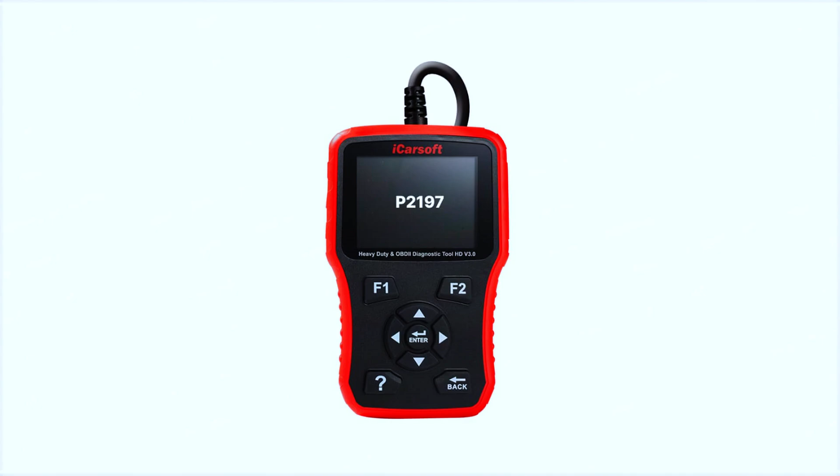Today, we're tackling the P2197 trouble code: oxygen sensor signal stuck lean on bank 2, sensor 1. If you're seeing this code, your engine may be running too lean, causing performance issues and poor fuel economy. Stick around, and I'll show you how to diagnose and fix it.

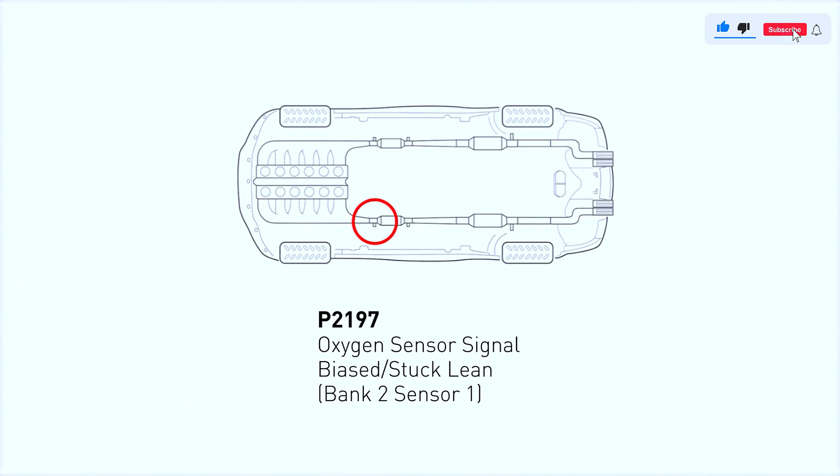P2197 is an OBD2 diagnostic trouble code that indicates an issue with the oxygen sensor. It means that the powertrain control module (PCM) has detected that the air-to-fuel ratio is too lean. Check engine light. Misfiring engine. Reduced power. Rough running motor. Overheating engine. Reduced fuel economy.

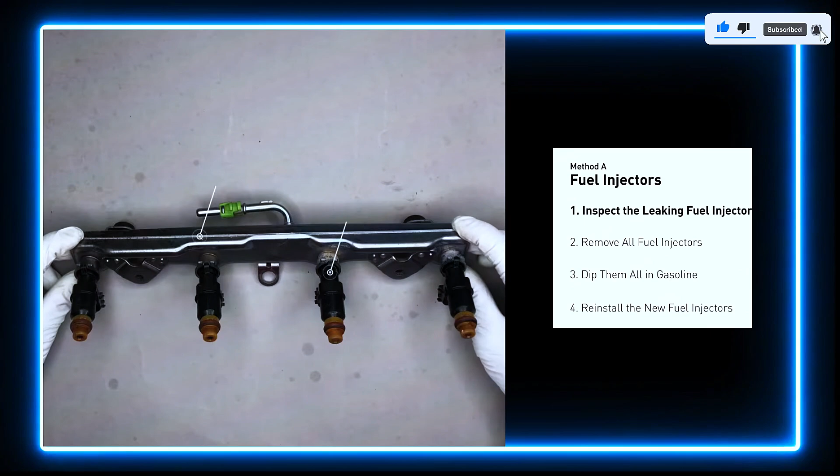The fuel injectors are mounted in the intake manifold, so that they spray fuel directly at the intake valves. Inspect the leaking fuel injectors on the fuel rail. Carefully remove the fuel injector. Make sure the new injector has new seals, and never use the old seals. When you change the fuel injectors, change them all as a set, otherwise the engine will run unevenly.

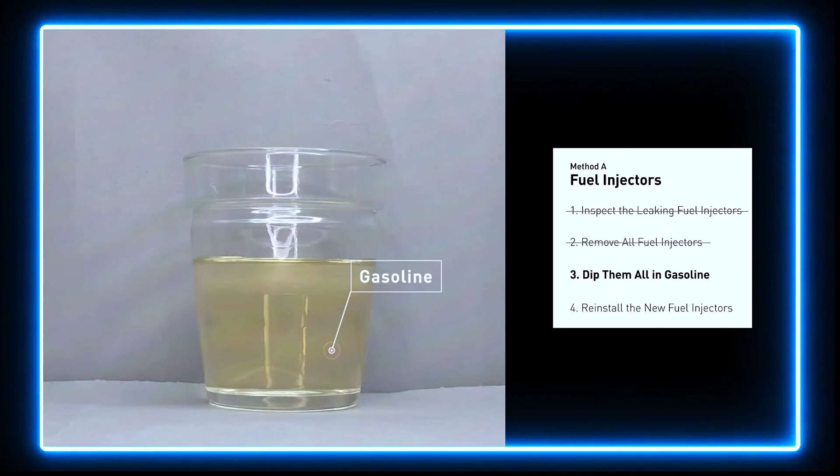In order to prevent leaking, get some gasoline, put it in a cup, and then dip the new fuel injector into it. So the seals get wet with gasoline, and it will go in and won't leak after all. Just slide all the new fuel injectors in.

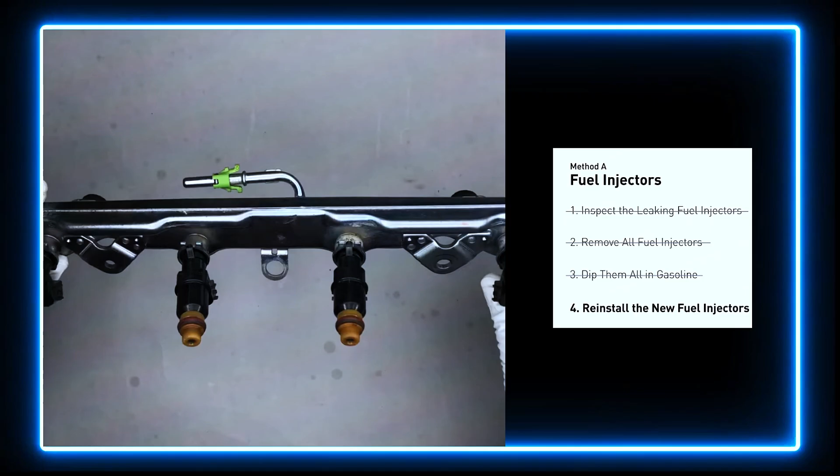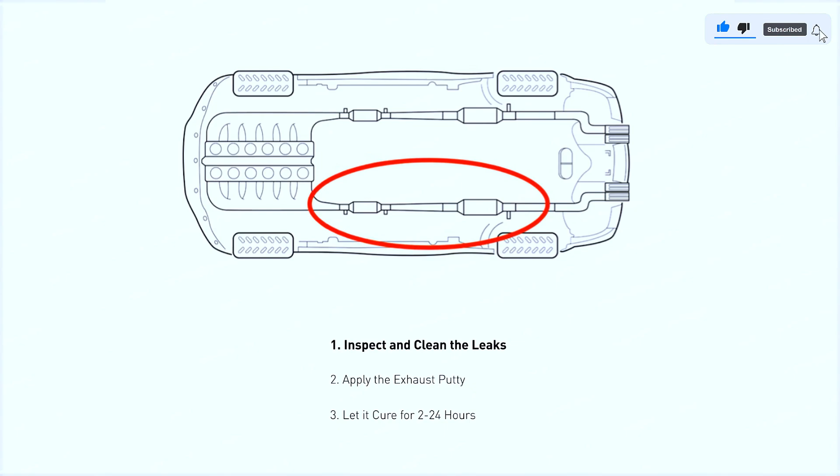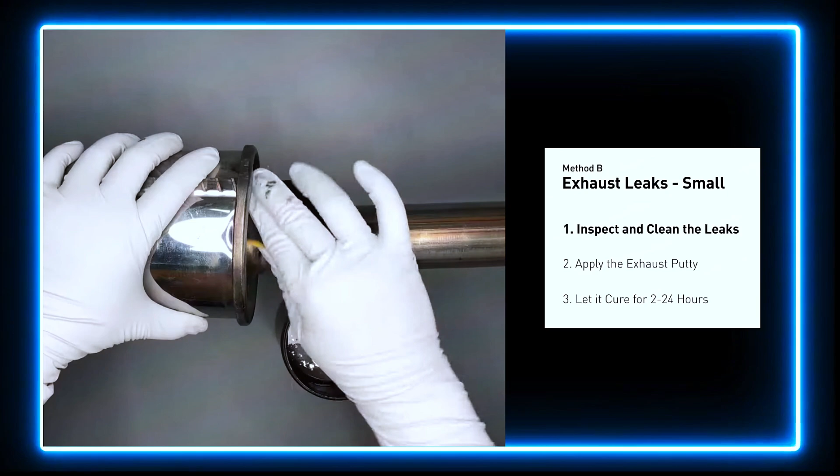The exhaust system begins at the engine combustion chambers and runs along the undercarriage of the vehicle, eventually ending with a visible tailpipe. If you have a small leak around the corner, get some exhaust putty to seal it up. First, get a sandpaper and a wet wipe to clean the leaking area for better application. Stir the paste a while to activate it. Apply and press the paste to seal the leaking area.

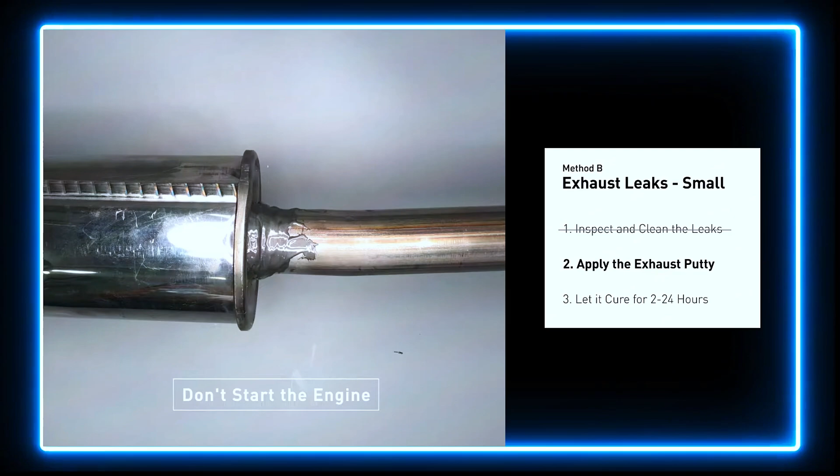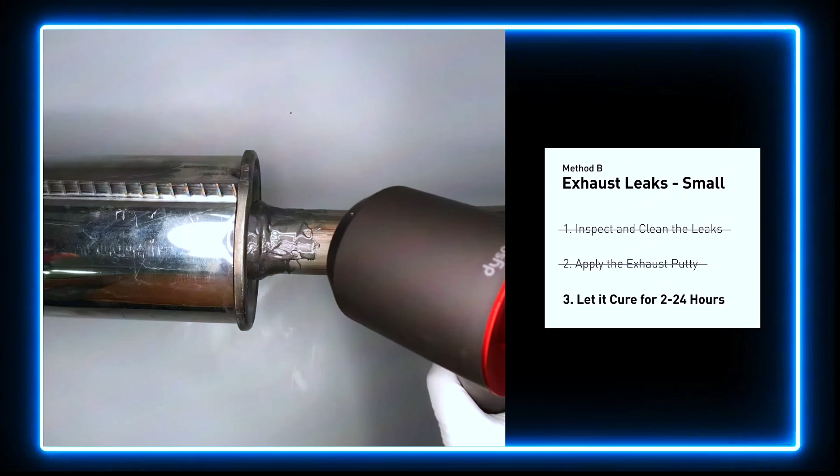After the application, do not start the engine, because the positive pressure from the exhaust will blow out the paste. Let it cure for 2 to 24 hours, depending on the external temperature. The hotter it is, the quicker it will cure. That means you can use something like a hair dryer to heat it up and make it cure faster.

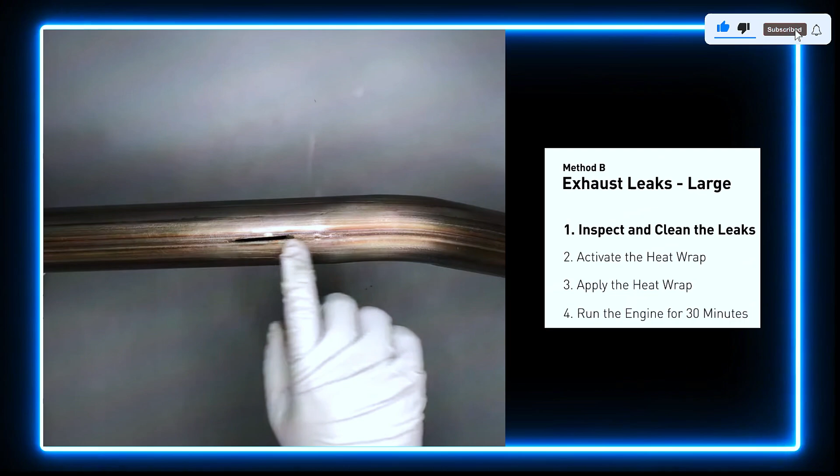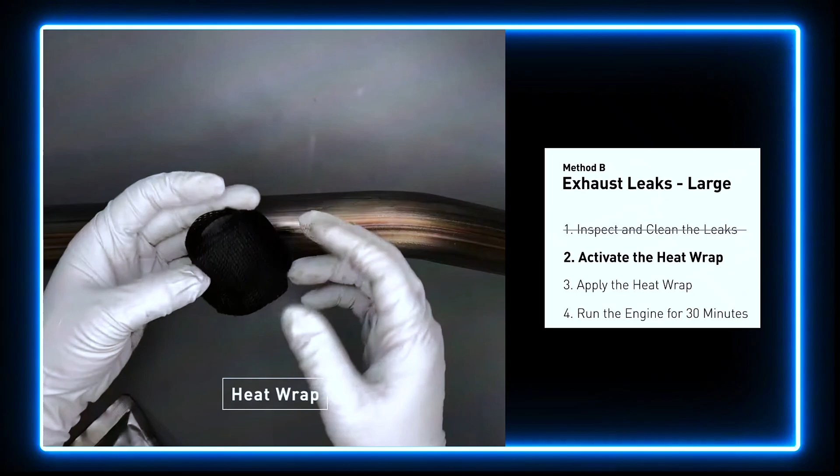Exhaust pipes are made out of rolled steel, and there is a welded seam on it. Like this one, the seam will often rot largely. First, get a sandpaper and a wet wipe to clean the leaking area for better application. Get the heat wrap out and put it in the water for about 30 to 40 seconds to start the activation process. Then remove it and squeeze out any excess water.

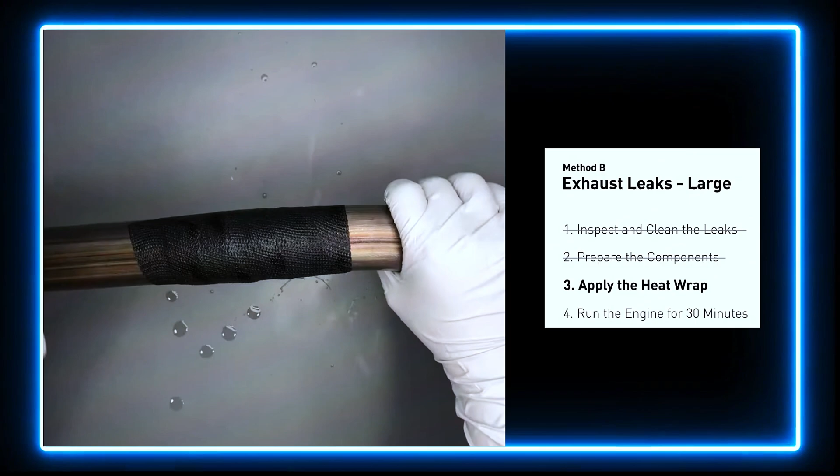Wrap it around the area and overlap it a couple inches on each side. Repeat the process 3 or 4 times. Then squeeze it to make the resin go through it. Start the car and let it run for 30 minutes, so the heat cures it and makes a permanent fix.

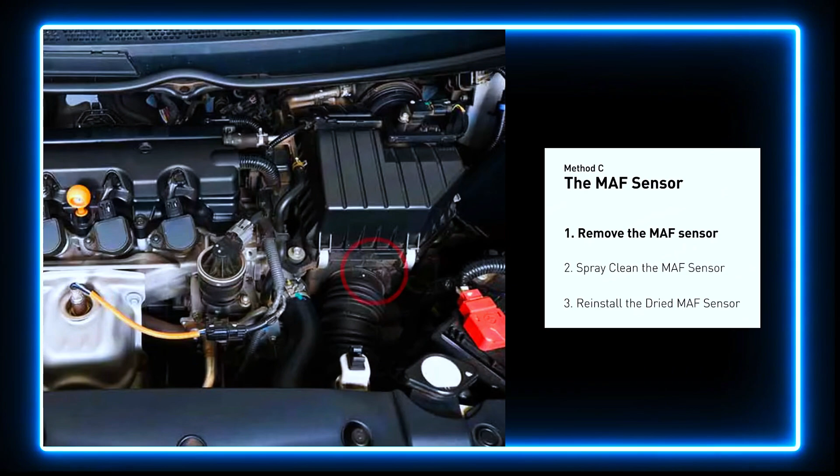MAF sensors are located between the air filter and the throttle body. Carefully remove the MAF sensor from your car and do a quick inspection around. The wire inside often gets dirty and needs to be cleaned. You can spray the MAF sensor cleaner onto the wire, perpendicularly to the ground, so that it won't damage the MAF sensor. Reinstall the MAF sensor back in the car after it gets dry.

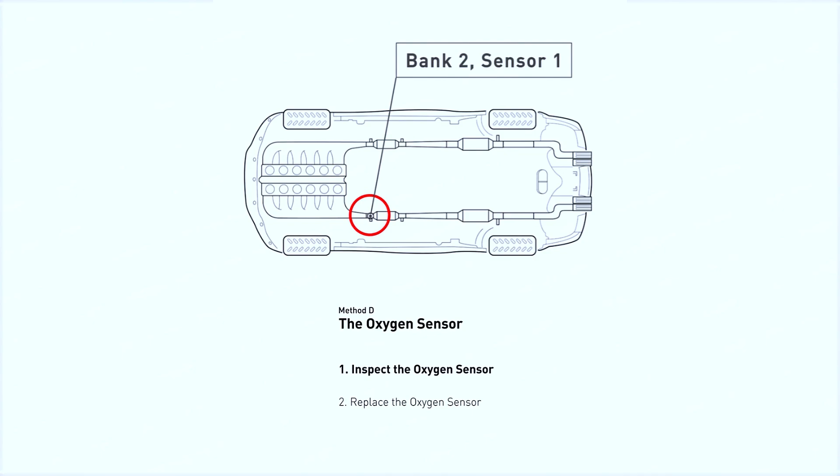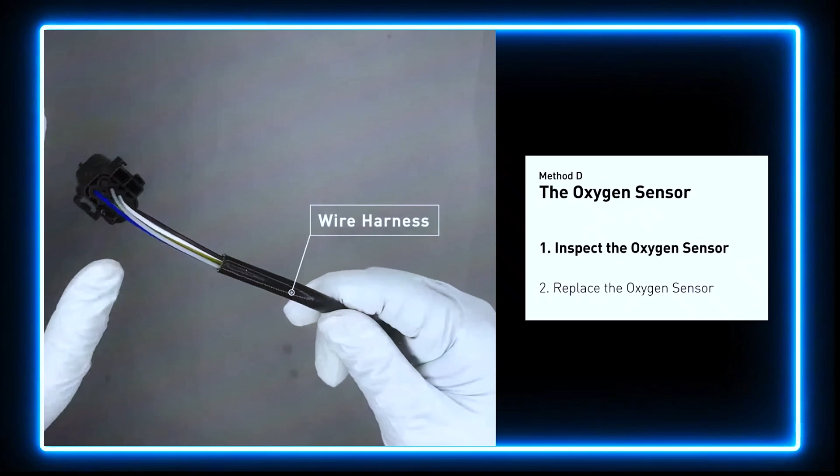This oxygen sensor is located right before the catalytic converter. Bank 2 is on the side with the cylinder number 2. Sensor number 1 is usually the one in the exhaust manifold. Visually check the oxygen sensors, electrical connections, wire harness, and metal tabs for any damage. If damage is found, then replace the oxygen sensor.

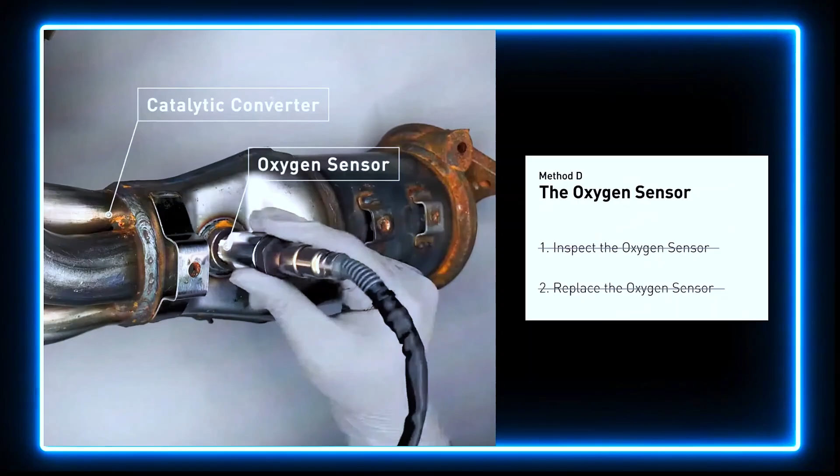After completing the repairs, clear the codes using the OBD2 scanner and take your car for a test drive. If the check engine light stays off and the symptoms are gone, you've successfully fixed the P2197 code.